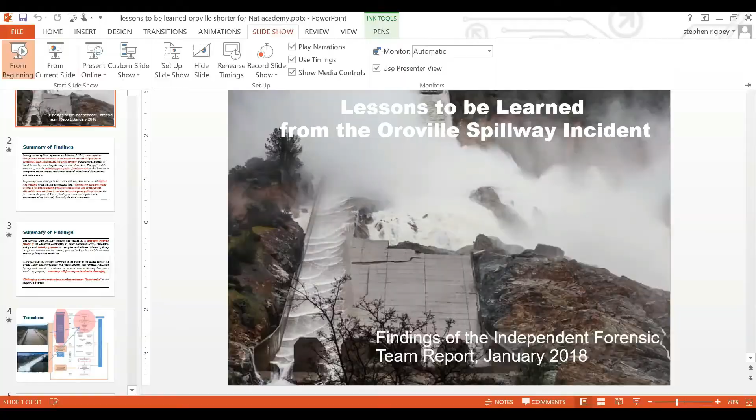Stephen is currently the Director of Dam Safety at BC Hydro in British Columbia, Canada, and he's been in that job for the last 10 years. Prior to that, he was a consultant in the dam engineering and dam safety area. Throughout his career he has been active in the Canadian Dam Association and also in ICOLD, the International Commission on Large Dams. He has considerable depth and breadth of experience and served a unique role on the forensics panel. So Stephen, thank you for agreeing to participate and share the lessons from the panel's work, and I'll turn it over to you.

Thanks so much, Marty, and thanks for having me here. It's nice to be able to share this presentation with this audience. I'd like to start by putting our work in a bit of context. We had to literally sift through hundreds of documents, and we went through about 75 interviews.

Even after all that, what we found is that we were still missing a fair amount of information, and we also had a lot of conflicting information. So what I'm going to present is really our best interpretation of what actually happened, particularly in the context of the decisions made during the incident. With that brief introduction, I'm going to dive right into the summary of our findings, essentially walking us through the executive summary of the report.

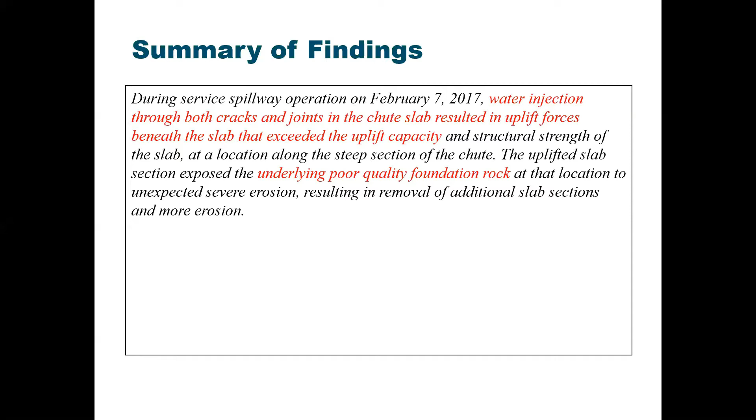As you learned last week, the physical aspects were fairly easy to discern. It was water injection through cracks and joints in the chute slab, uplifting a portion of a slab or a small portion of a previous repair. Once that uplift occurred, there was very quickly a large amount of erosion of the very poor quality foundation rock by the high velocity water.

The problem was, once that had happened, there were a lot of very difficult risk trade-offs that had to happen between using the damaged spillway and the potential use of the emergency spillway, which had actually never been used. The decisions that were made, which I'll go through in detail, resulted in the emergency spillway being used, with subsequent downstream erosion and the necessity for the evacuation order.

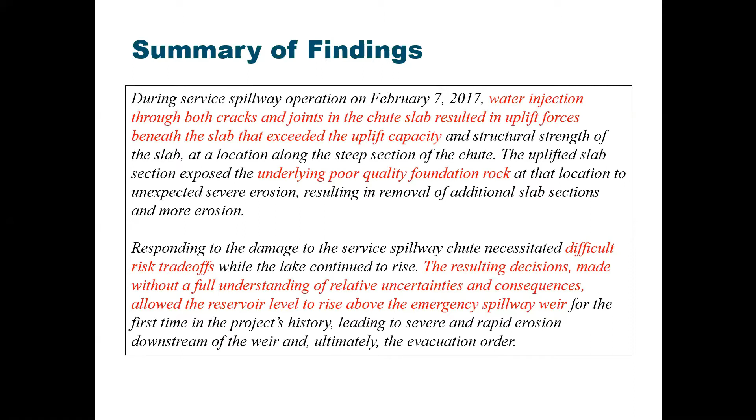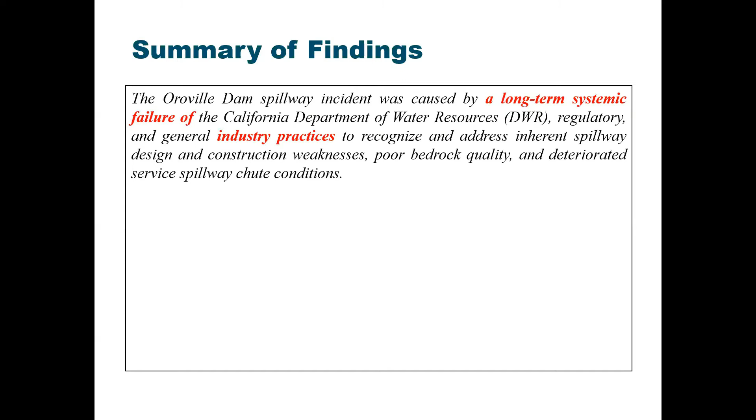We never found one root cause or one single path to failure. It was really a long-term systemic failure of just about every industry practice, regulatory practice, and internal DWR practice of dam safety, all intertwined to cause the incident to occur. None of them recognized or addressed the inherent design and construction weaknesses, the poor bedrock quality, or the deteriorated spillway chute conditions. The big lesson is that this happened to the owner of the tallest dam, regulated not by one but by two agencies, repeatedly evaluated by very reputable people. It's a wake-up call for everyone in the dam safety industry.

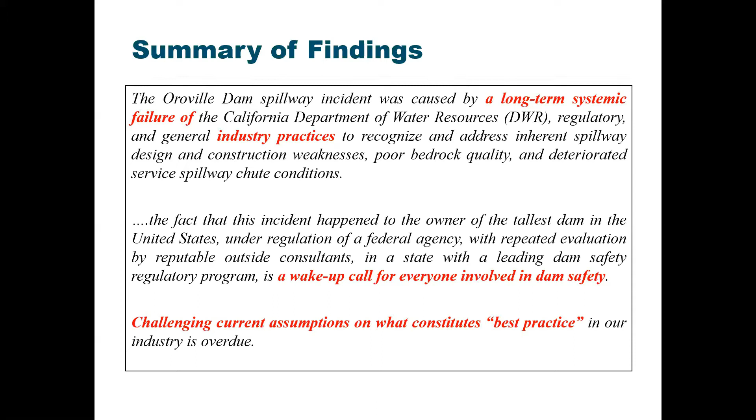What we have to do now is check and challenge our current assumptions on what constitutes best practice in our industry. It's long, long overdue. So we put together this diagram, which looks a bit complicated, but it was an attempt to show how the physical, human, organizational and industry factors intertwined to make this incident occur.

The physical factors are in blue, the human organizational factors are in the flesh color, and I'm going to work down the timeline through the middle of this diagram, starting with the initial design concepts, the final design, and how that led to the initial cracking and the high drain flows.

As you heard last week, there was initial cracking that occurred literally a month after the spillway had finished construction. You can see them there in the diagram here. They essentially were tracing the outline of the underlying drainage system.

This led to a path for water injection, and there was, again, right from the very beginning, large drain flows. You can see all of these drains along the side of the spillway that were collecting the under drain flows and exiting during the flow. That was first noticed in 1969.

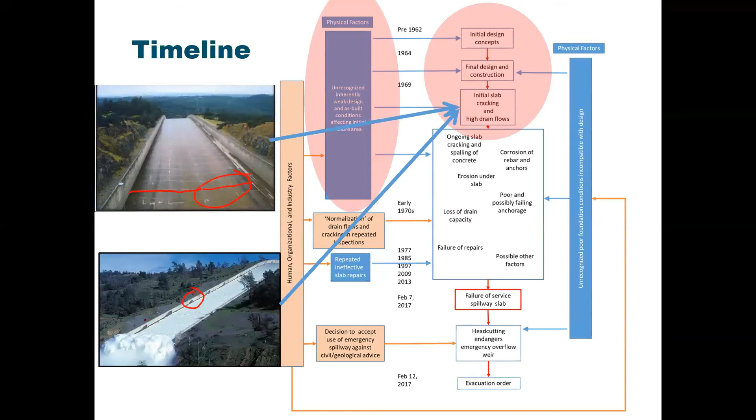So these were unrecognized, inherently weak designs. And as John went through last week, there were quite a number of different reasons. There were no water stops or anything between the open joints in the concrete slab. The concrete slab itself was only designed to be 18 inches thick, and within that 18 inches, the under drains actually protruded into that thickness, so that in some cases you had only 8 or 9 inches of concrete.

In there were a series of mats of rebar, of reinforcing steel, which, because water could get in there, corroded, expanded, and popped out these areas of weak concrete on top of it.

They were subsequently repaired, and they again failed, and there was a repetition of this patching on top of all of these cracks. You can see here's where the drain used to be, in this piece of slab that was taken out during the forensics. Because of the positioning of the drain, you had this natural tendency for the concrete to crack on top of it.

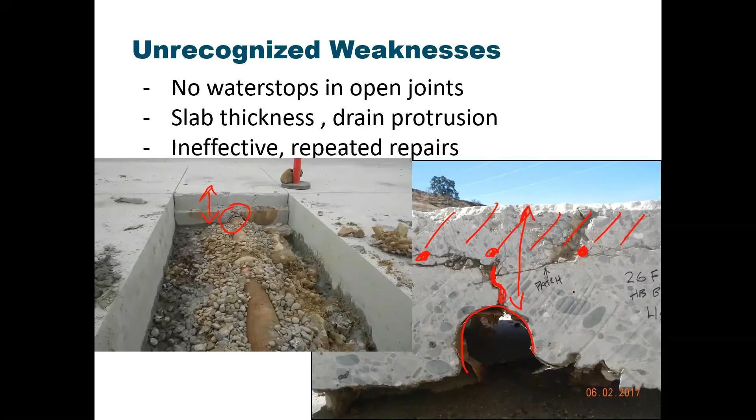So why? Why were these issues not recognized? There was a total incompatibility of the as-constructed spillway with both its foundation and hydraulic conditions.

We did know at the end that there was an inexperienced designer involved who had very little oversight. But the main thing was there was the lack of adjustments as the in situ conditions became apparent during construction. This lack of adjustment was mainly due to poor communication. DWR, as many owners were, was really siloed into design, build, and operate divisions, and that was one major issue.

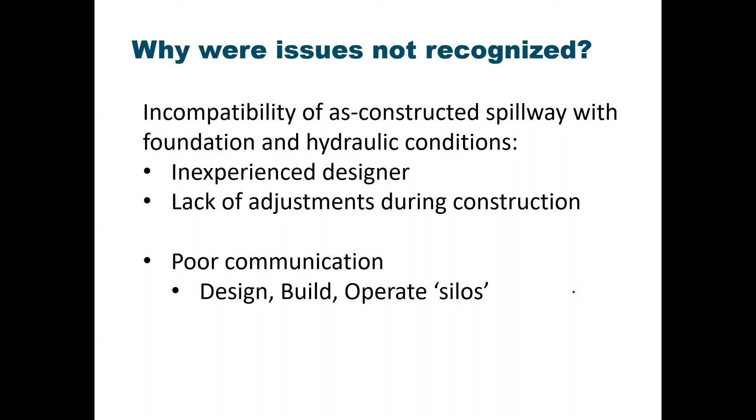There was certainly some ongoing cracking and spalling, that the water flows under the slab were causing a little bit of erosion to occur, not much, but a little bit. There was, through the years, a loss of drain capacity. The repairs kept failing. The anchorage of this spillway slab, as John would have told you last week, was beginning to corrode. And of course, the reinforcing steel itself was corroding as well. So all of these things were happening at once.

The thing was, along with the repeated ineffective repairs, which is a physical factor, there was a normalization of deviance. People saw this, but because it had always been that way, they never recognized it as being a real problem. I'll give you some examples.

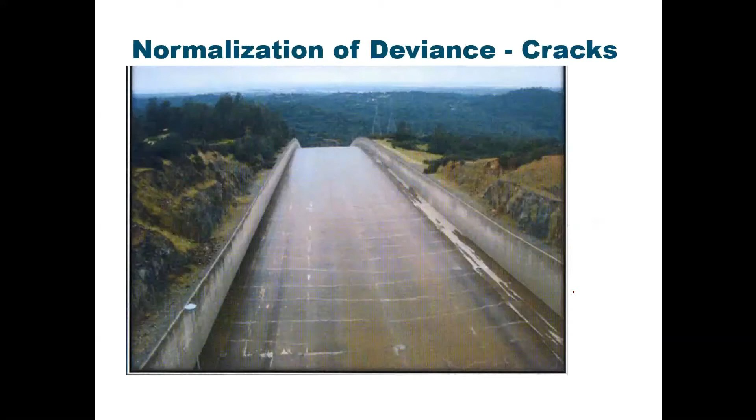Back to the picture of the cracks above the drains. These cracks in 1969 were noted. It was very clear that they were on top of the under drains, and it was stated in a report from 1969 that an inquiry to the designers regarding this aspect would be in order. However, we found that that inquiry was actually never made. We certainly couldn't find any evidence that they ever actually got back to the designers about this.

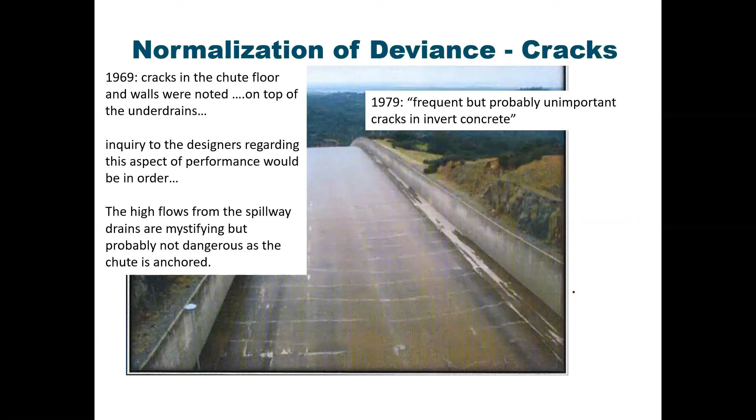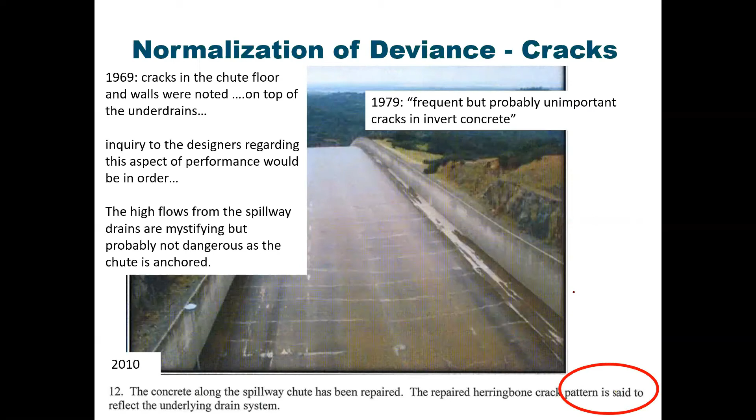They called the high flows mystifying, but probably not dangerous. Now, 10 years later, in 1979, they're now referred to as frequent but probably unimportant cracks. Flash forward to 2010, and the corporate knowledge of why those cracks are there and what their significance is has actually been lost. The repaired herringbone crack pattern is said to reflect the underlying drain system. Things just became normalized over time.

Again, with the flows, same thing. The same inspector that wrote in his report in 1969 that these flows were mystifying and had to be investigated and discussed with the designer, by 1973 that same guy is writing in his reports, 'all conditions are normal.'

Outside consultants also perpetuated the problem by essentially noting that there was no formal monitoring program for the flows, but they never asked for any.

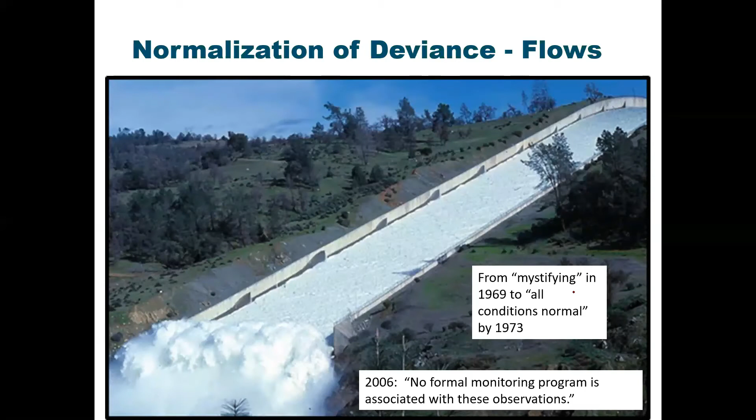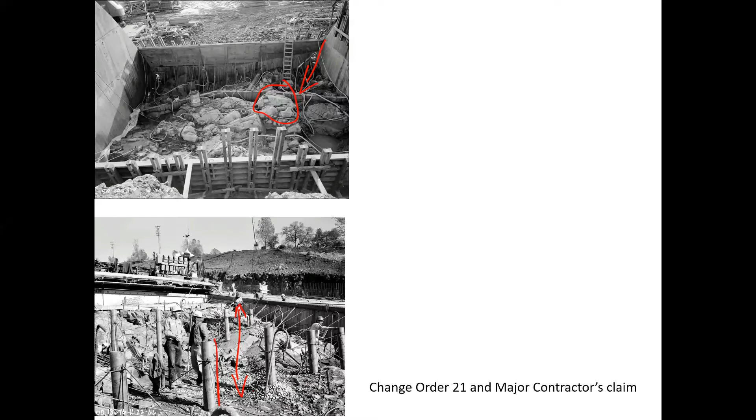Now, there's a guy standing, so that's got to be up to 6 feet of excavation to get down to this good rock. And you can see these sonotubes here to extend the drains down to the foundation surface, indicating that the drain system was designed to pick up any water inflow into the drains from the foundation. They were not designed to pick up water getting in from the surface down.

The problem was there was a major claim during the contract because the contractor was making out like a bandit. He was excavating all of this material, backfilling it all with concrete, and because the specification didn't cover this possibility, it was all on time and materials, and he was making a good buck out of the whole thing.

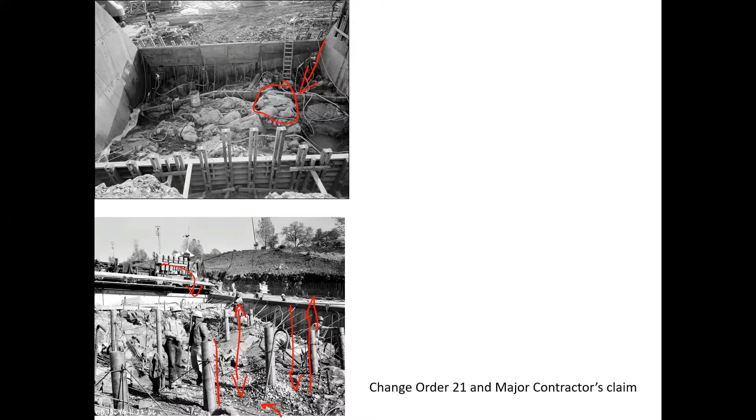DWR was getting very worried about the costs, and they made the argument that it was the contractor's excavation technique that was causing the problem. And their philosophy was the rock is good. It's your problem that you're excavating so deep.

So they ordered the contractor to only go down 18 inches as per the original design, and they relaxed the specification to allow what they call 50% compacted clayey fines, which was essentially just the broken up weathered rock on the surface to stay in place without any washing.

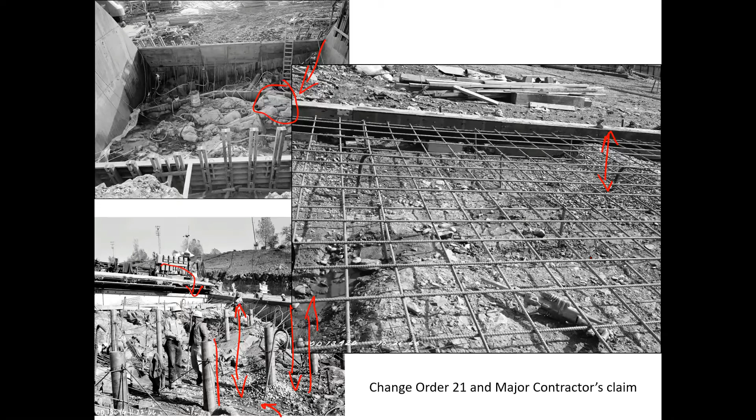So as the years went by, there was a corporate myth that the rock was good. And we believe that started because of the DWR defense against the contractor's claim. However, there were missed opportunities along the way to really check this out.

There were two specific studies in 2005 and 2009 to look at the erodibility of this rock when it was questioned whether or not the rock was actually good. These reviews actually appended the details showing that the rock was highly and strongly weathered. However, they concluded the rock was good.

But nobody caught this. There was no internal reviews, no QA, QC, no questioning. These were sent to the regulators. The regulator didn't catch the fact that the memos did not correlate to the attachments and the data. All the dots were there, but nobody connected them.

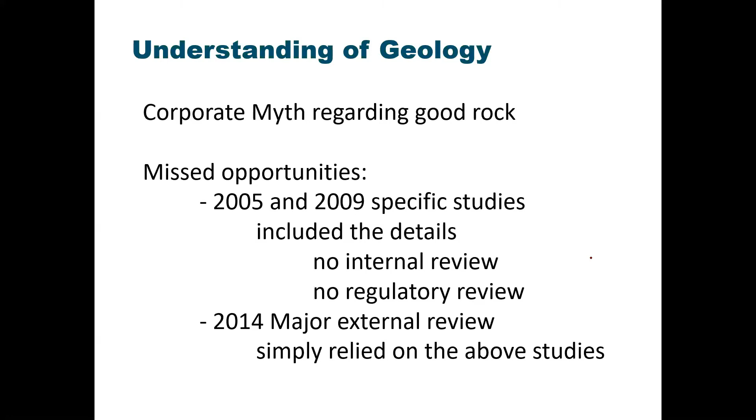What happened after 2005 and 2009, every subsequent study just quoted the 2005 and 2009 reports saying the rock is all good. Back to our decision, back to our timeline again.

So we had all of these things happening, unrecognized. The potential for erosion underneath was unrecognized, and we get to the failure of the service slab itself, which looked like this, as you would have seen last week.

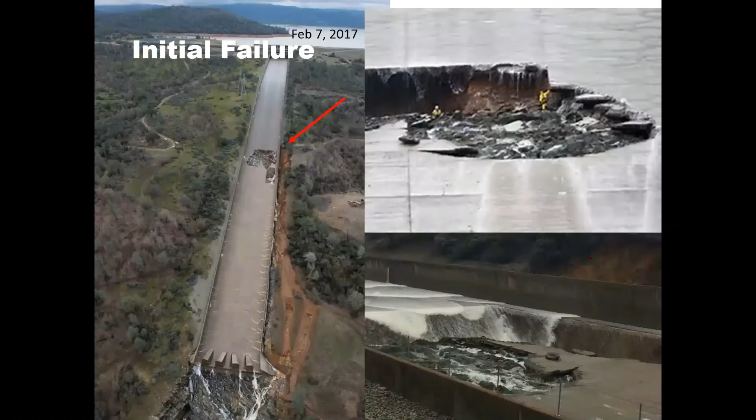Interestingly, I'm sure John told you last week that we know a fair amount about the initial failure because there were two guys standing, just happened to be working on a communication tower at the point just about 100 feet above where the initial failure occurred. So we actually know a fair amount about the failure itself.

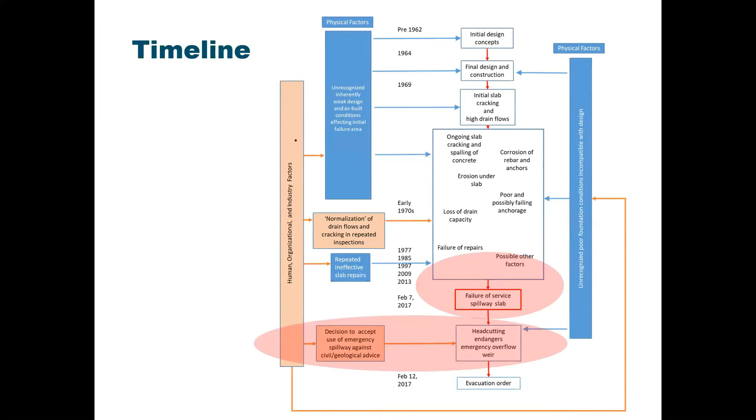But again, it still wouldn't have been a problem or a significant problem had the emergency spillway not been used. So there were specific decisions that were made that allowed that emergency spillway to be engaged for the first time. And there was the subsequent head cutting back towards the overflow weir that caused the necessity for the major evacuation of people. So what happened there?

They had to reopen the service spillway after the initial failure, which was about there, simply because the rains were still coming and the reservoir was still rising. There was a whole series of problems to think about and to weigh against each other.

First of all, as there was more and more erosion going into the river, you can see the river here has turned brown. There was major blockages beginning to occur downstream.

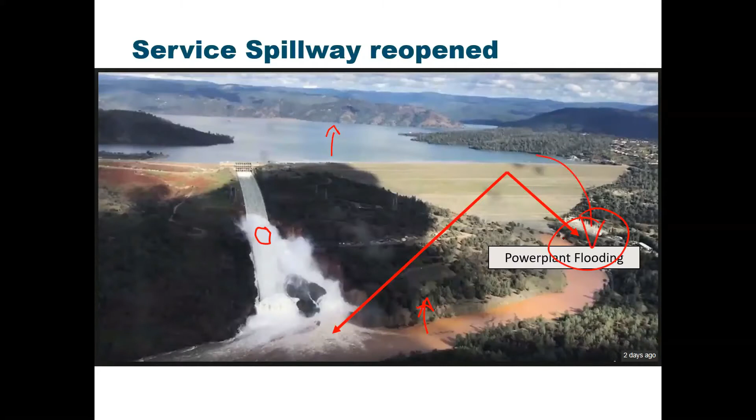The tailwater level was rising, which was affecting the power plant, and the power plant could have easily been flooded. Had it been flooded, it would have been a major problem, not simply because of the damage to the asset, but the fact that they would then lose one of the major ways of moving water out of the reservoir through the powerhouse itself. Major, major concern. There were other concerns at the same time.

As they were continuing to use the service spillway, they were worried about it beginning to head cut back towards this structure. And if that structure, the spillway gate structure, were taken out, that would be a major loss of reservoir containment. You can see here that the erosion was continuing back towards these transmission towers. The transmission towers were the main towers attached to the Hyatt power plant, and thus if they went down, you'd again lose the capacity to move water through the power plant.

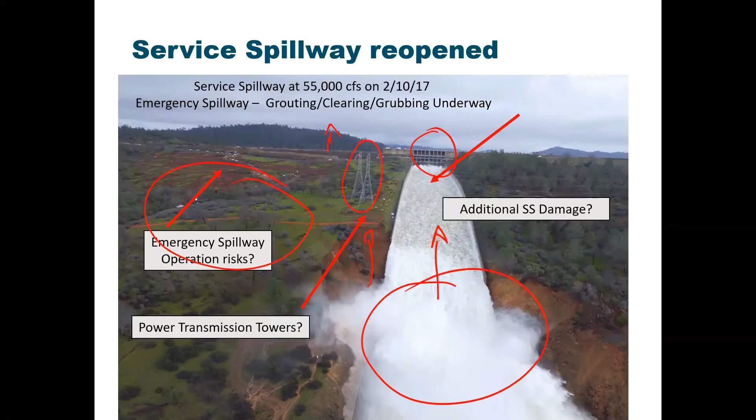And finally, they were worried about using the emergency spillway as this water came up behind it because it had never been used. And they now know that certainly down here there was a bad rock. They really didn't know what was going on here. So there were a lot of risks that had to be balanced. And in the end, there were two very strong points of view during the emergency management. One point of view was to continue to use the service spillway. One was to use the emergency spillway. And the decision makers decided to treat the risks of using either spillway as equal.

So they had incoming reports, hydrologic reports, in terms of how much the reservoir was going to rise, and they decided to try for a sweet spot where they'd allow the service spillway to be used just enough so that they'd just get to the top of the emergency spillway without overtopping it. That was the plan. Because that was the plan, they used the mean value from the hydrological models without considering the uncertainty band around that mean. The rest is history. They missed the sweet spot.

The overflow weir did get overflowed at about 3% of its capacity, and it resulted in the evacuation order because there was, as you can see, a lot of head cutting back up to the structure. At this point, it stopped about 10 feet short, and they made exactly the right call to evacuate those people because they didn't know whether it was going to stop there or cut back, and that erosion was going back at a rate of about 10 feet an hour.

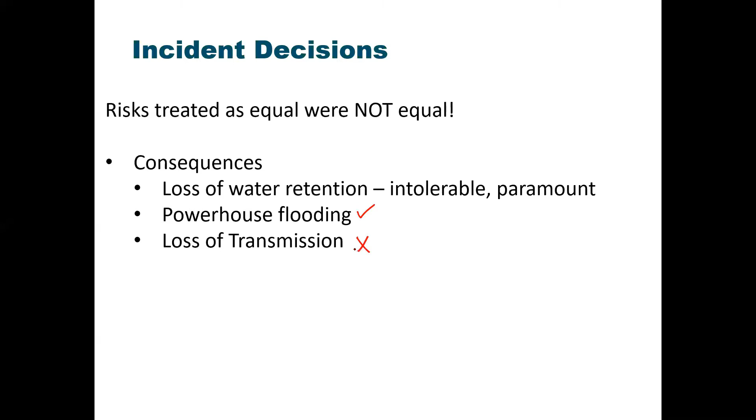The decision makers were told at one point that if the transmission tower was lost, they would be out of commission for 6 months. This was actually not true whatsoever. There was a little bit of a problem with people understanding the consequence of loss of transmission. In actual fact, it would have only taken the powerhouse out for a few days. However, with the likelihoods of all those consequences, remember that risk equals consequence times likelihood, the likelihoods were changing, but they were not being adjusted in the minds of the decision makers.

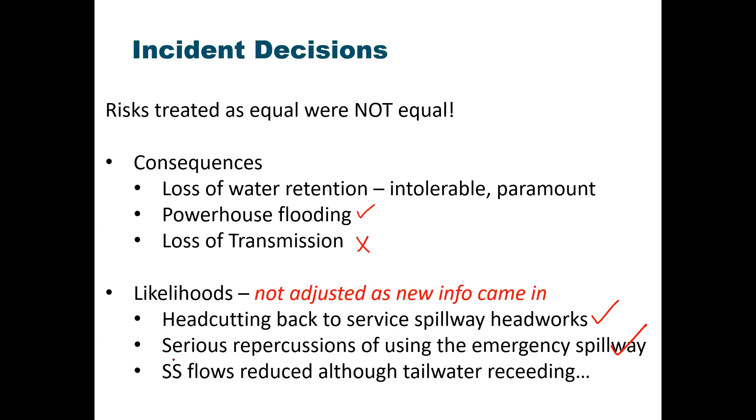People were beginning to understand, because they now looked at the geology in detail, that the headworks were in pretty good shape. They were sitting on good rock. Head cutting wasn't really going to happen. The likelihood of that was going down. They understood now that using the emergency spillway was going to be a big deal because they knew that there was bad rock behind the emergency spillway. And they also knew that their tailwater was actually receding. The likelihood of flooding the powerhouse was actually going down constantly throughout the process. However, service spillway flows were still reduced, trying for this sweet spot, because they didn't believe they had to spill as much as they actually had to at the end of the day.

So a whole bunch of lessons to learn here. Lesson number 1, dam owners have to start thinking about having a strong top-down dam safety culture. There was no one executive specifically charged with the overall responsibility for dam safety. The decision makers didn't have a good enough grasp on what dam safety actually required.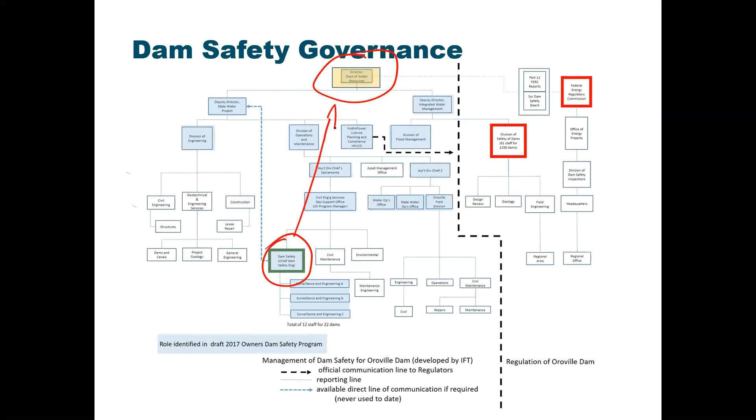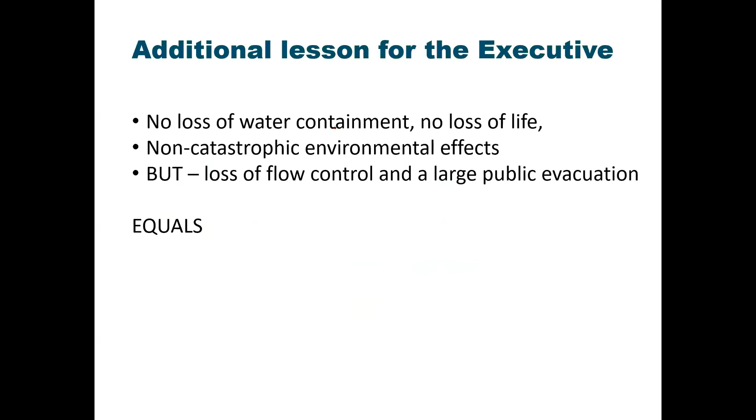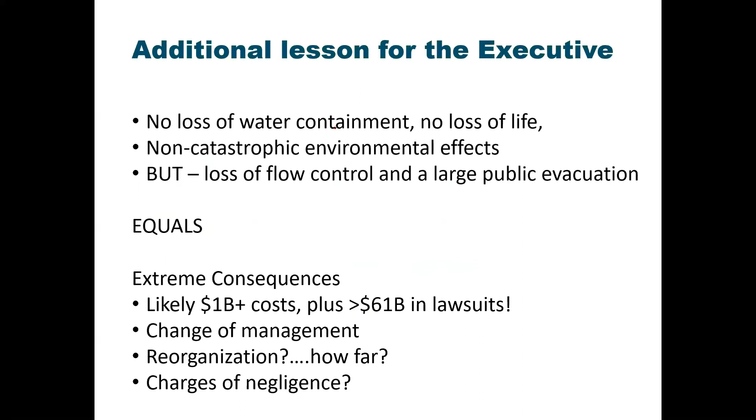Lesson 2. It's not all just about uncontrolled release of reservoir. In this particular case, there was no loss of water containment, no loss of life. Really a non-catastrophic environmental effect, but they lost control of water, had the big public evacuation. But what that meant for DWR is a world of hurt. They're over $1 billion in costs to fix. They have more than $61 billion in lawsuits. They've had changes of management, they're reorganizing, and there's talk of charges of negligence. It is a bad deal for DWR, and it could have happened to a lot of owners.

Lessons 3 and 4, it's not all about physical inspections. You got to think about what the original design construction actually means. You have to do comprehensive reviews of that. And you can't forget about appurtenant structures. Just because this is the tallest dam in the United States doesn't mean that the spillway doesn't count as well.

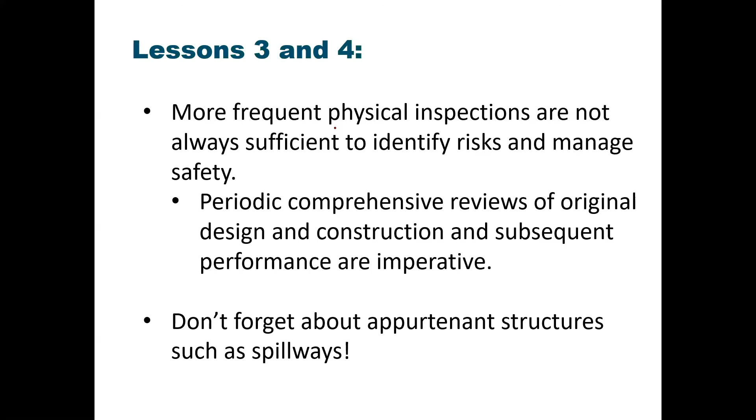Lesson 5, don't rely on your regulators. Compliance with simple regulatory requirements is not sufficient to meet any owner's legal and ethical responsibilities. An owner has to be aggressively inquisitive, got to ask those questions, has to proactively investigate things they don't understand, and to do that, a dam safety engineer needs support from the very top of the house.

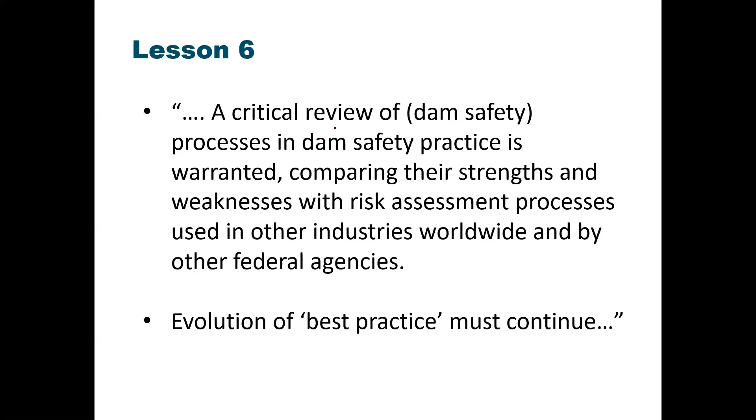Finally, lesson 6, we have to do a critical review of the processes that we believe are best practice. They let us down. As I said a few weeks ago at another conference, there's only 2 ways to explain Oroville. Either everyone in the dam safety community is incompetent, or the processes that we depend on are simply not good enough. We have to look at best practice and have an evolution of this best practice over time on a continual basis.

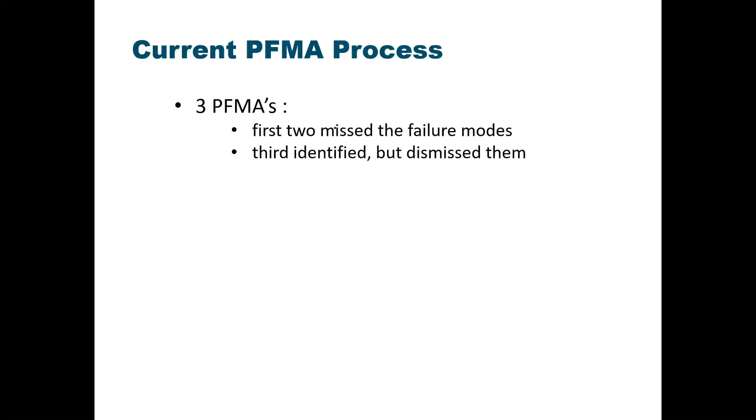Leading to my last couple slides, for those of you in the audience who know what a potential failure modes analysis is, there were 3 potential failure modes analyses done for Oroville. The first 2 missed the failure mode that actually occurred. The third identified the failure modes, but dismissed them as irrelevant, mainly on the value of the testimony that the rock was good and it would not head cut back up and lose the reservoir.

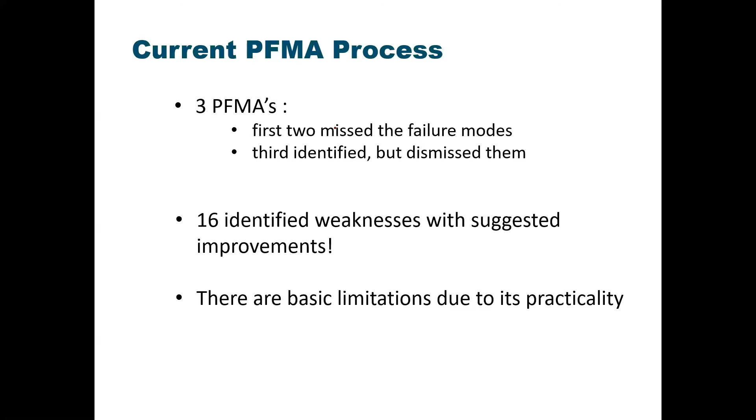Our report identifies 16 weaknesses with the current process with suggested improvements. But in those 16 weaknesses, I believe there are basic limitations because the PFMA was set up as a practical process. You can get through it fairly quickly, but its practicality leads to some basic limitations. It talks about sequences of events, a nice linear sequence, but in actual fact, this was not a linear sequence of events. Failures of individual components were not thought about in terms of what they would mean to the safety of an overall system.

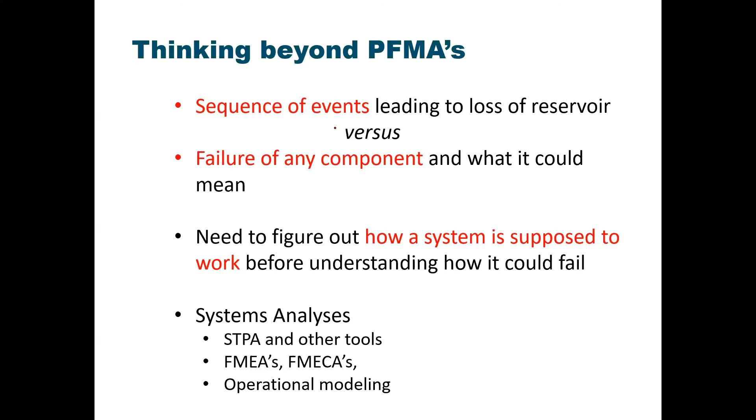What we need to do is figure out how a system's supposed to work before we can understand how it can actually fail. Whereas at the present time we start just thinking about how things can fail. There are systems analysis tools out there. There's a whole series of them done in other industries and in other countries. We've got to look at these and understand how we can incorporate them in our dam safety thinking.

Back to lesson 6. As I said, there's only 2 options to explain Oroville. Personally, I would rather choose the second option. I don't particularly want to consider myself as being totally incompetent, but the people who reviewed Oroville were certainly as good and better than I am. We need to do critical reviews. We've got to look at other industries and look internationally for assistance in how we can improve our dam safety practices.

And finally, maybe most importantly, these are lessons to be learned. We haven't learned these lessons. They're going over and over again. Throughout the decades, we have dam safety failures. We are not learning these lessons. It's time to learn them.